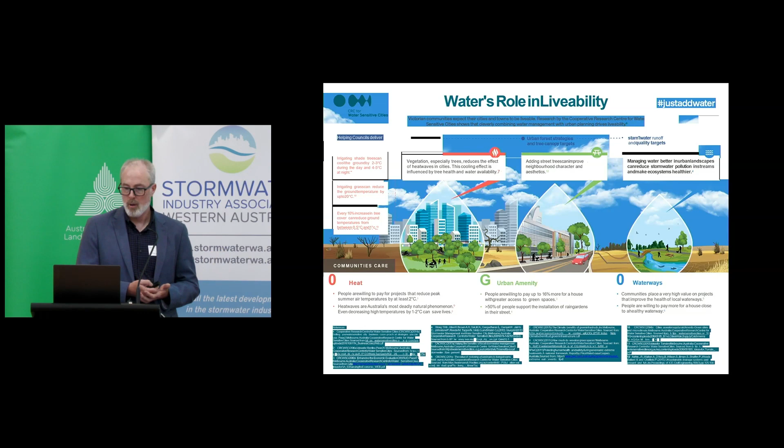When we look at this vision and these ideas about livability, I love this slide and I love where it came from, and I could just talk about this, but I need to stay on track — because this came from Waterwise Perth, Kep Kadajin, Gubby Gudajin, the Waterwise plan for Perth.

This shows the vision of what we could create. I won't get into all the details, but really it's about connecting people to nature and connecting people to water for livability outcomes, because at the moment, and the way our city's developed, we haven't been doing that.

We've typically had these types of systems — single use, fenced off, behind barbed wire, inaccessible, and just for that one purpose of drainage. I do have to acknowledge, while this is a Water Corp site, it's just been a privilege and a pleasure to work with all the people from Water Corp, particularly the Livable Community section, and many others, to look at how we can transform these areas and change them from this single use to these multiple benefits.

Today I'll talk a little bit about Bannister Creek, and I'll talk about another project before we get onto Lake Street. But I'm really also talking on behalf of others, because this project started well before my time — Julie Roberts, one of the absolute legends in this space, now runs Fat Frog Consulting, Friends of Bannister Creek, Circle, Water Corp, all these amazing community members.

Sorry? DBCA. I was getting there, Debbie.

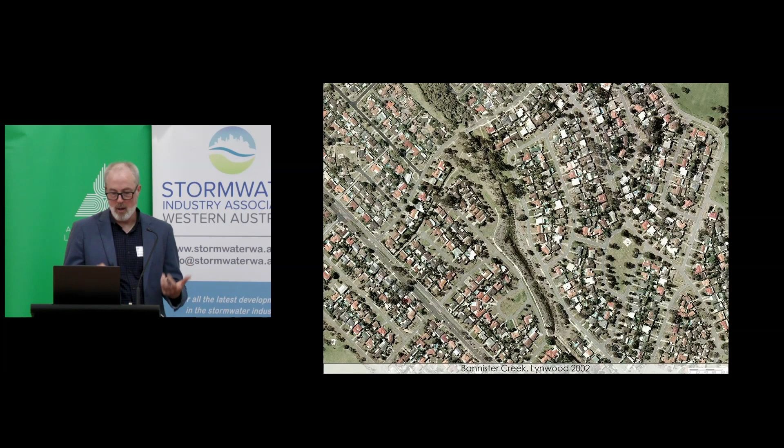This was Bannister Creek back in Lynwood, once part of that channelized natural drain. Over the years, Lynwood quickly moved with that vision to transform it back into a natural system, with ecologists working with engineers, working with landscape architects, with local community members to transform it. And this is what it looks like now. For so many people that travel and live in this area who haven't seen the development over the years, they just think it's a natural system. But it's an amazing example of how humans, through design and community initiative, can really heal our landscape and take a different approach, because this is still part of that system.

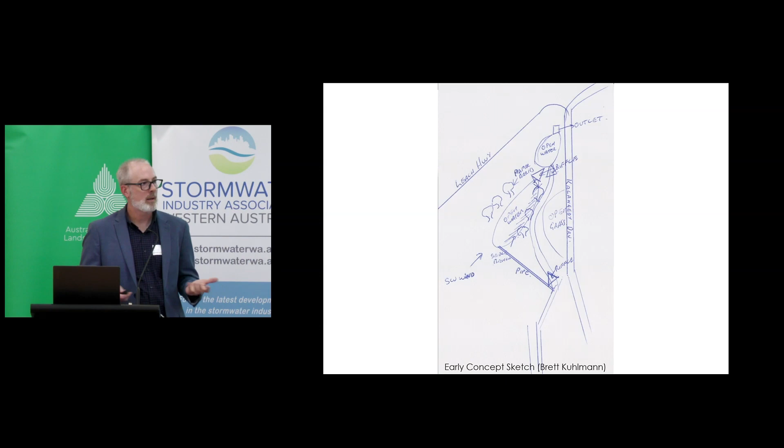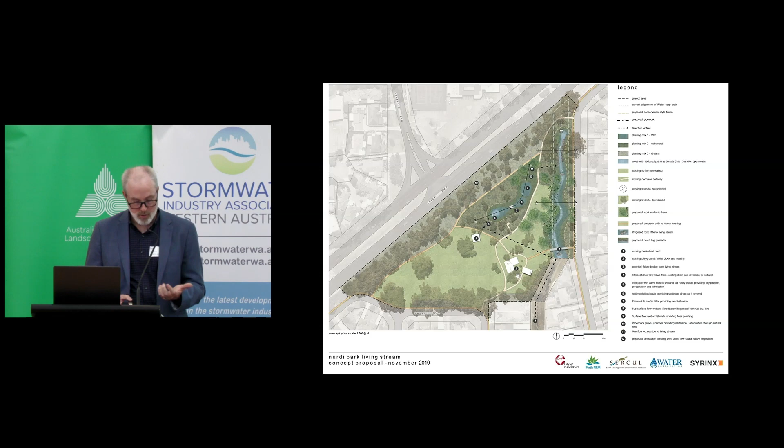Nurdi Park was just pretty much a big turf park. It didn't have a lot of interest, and there was a lot of space there. So this plan was developed with all those partners to actually create a living stream, but also a diversion and create a wetland within the park. And this has been embraced by the residents there. It hasn't led to a loss of the park. It's led to a greater richness being brought into the park. It's led to greater biodiversity within the park, and just creating a beautiful area.

Part of that beauty is from the plants and the biodiversity that we bring back. And that's certainly a message. With these projects, we have such an amazing plant diversity in Western Australia. We should be planting as many species as we can for resilience, for diversity. But literally through these projects, we have the power to bring back biodiversity, to help heal the land and create those food sources for the insects, for the birds, and for the whole ecosystem.

I'll just flick through quite quickly a couple of the photos of the project. Fenced off trapezoidal drain - let's not go back into the details of 2020.

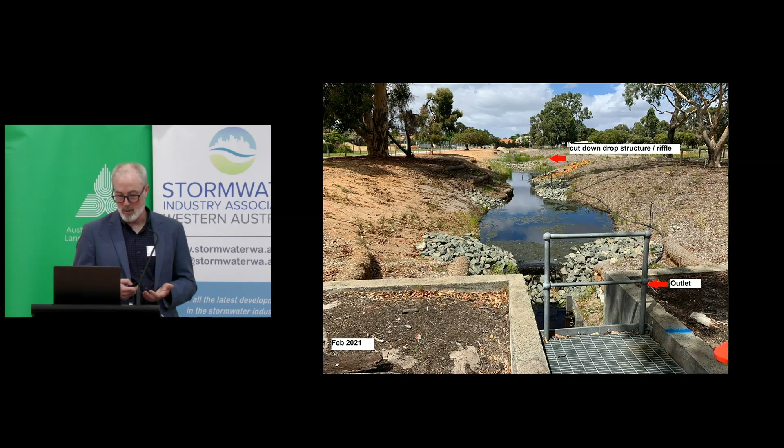Then quickly, as the project progressed in 2021, that reshaping happened, and by 2022, it became this beautiful natural system.

It's still adjusting, but we're getting really high counts of macroinvertebrates that are indicating a really high level of biodiversity within the system. It's that thing of build it and they will come.

Similarly with the wetland, rapid plant growth - we've got high nutrients, and that goes really well with plants in terms of those plants pulling those nutrients out of the system.

And again, some more areas that just so quickly transformed into these natural systems. For many visitors, for the first time, they just go, wow, this project's amazing.

It's been here for years, and going, no, it's actually only a few years old. But it's that power that we can have to transform our landscape for the better.

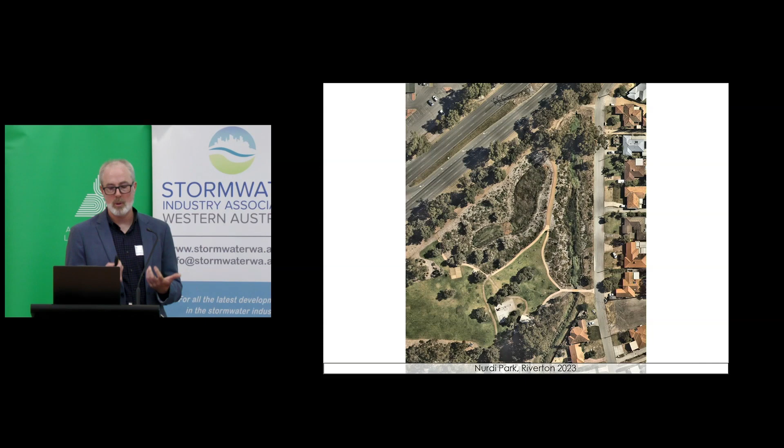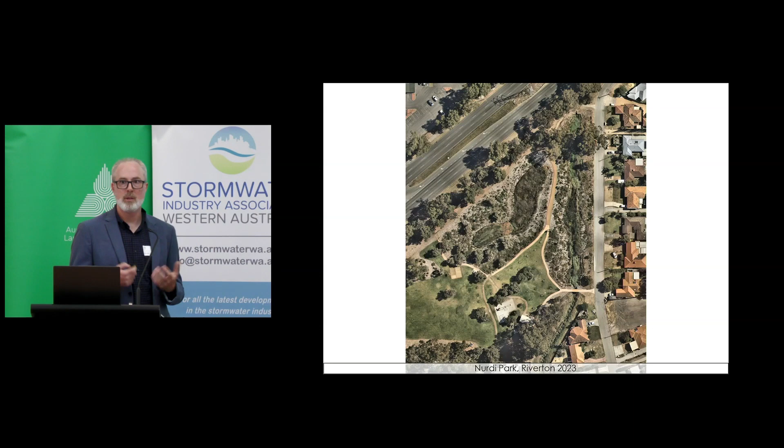Just a quick finishing up on the aerial of Nurdi, looking at that site with not a lot of interest to now - the path network, the local residents that are starting to actually form their own friends group and look after this site, the beauty that it brings into the space, and the biodiversity, the cooling and the livability just speaks to why we should be doing so many more of these projects and the opportunities that exist within our urban areas to do so.

Now I'll just touch on another large project and the intro into Lake Street. This is the Canning City Centre Master Plan.

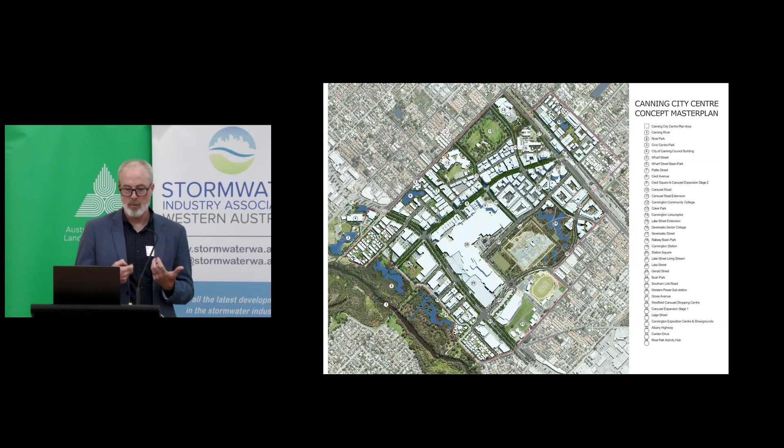At the City of Canning, we're one of the strategic metropolitan growth areas to have high density living around transport nodes. The City of Canning developed this vision to have a riverine city with the Djarlgarra at the base of the city centre, but linking these amazing water assets that are all through the city to the growth of its urban area and creating these connections, bringing nature back into the city.

How that might actually look more from a drainage management perspective - it's all these different drainage lines and spots all around the city that represent the drainage network that exists. But these also represent opportunities.

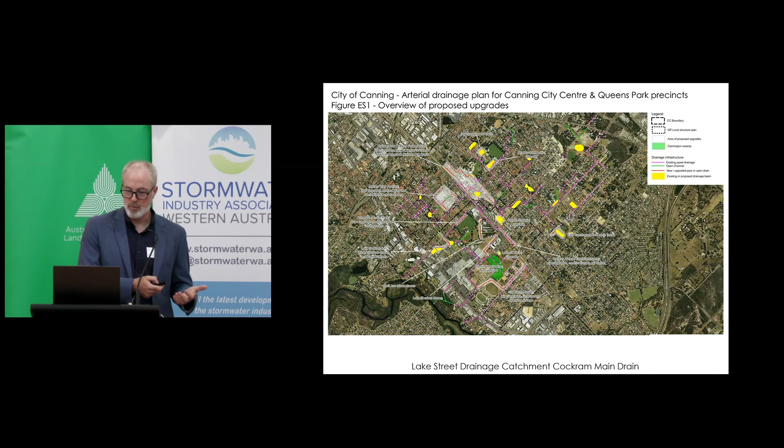We've had some amazing projects happen over the years at Wharf Street Wetlands and the Wharf Street Basin, and then recently with the Lake Street Urban Stream, which, funnily enough, started off like this.

But it was through that vision, through that plan, and through the ideas, but also through the collaboration that we're able to transform this area.

It started off with a number of concept designs, and I guess when I took this project on, it was also to start interrogating the designs and go, how am I going to build this? Or how are we - sorry, not I, it's a much bigger team - how are we going to build this? And how are we going to build it for the budget we've got?

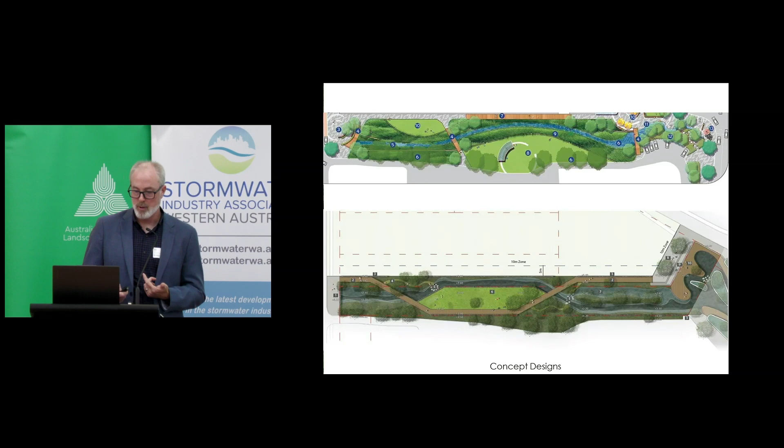So we actually went through a design review process and started questioning some of the elements in the concept design, and actually made the decision to move to a design and construct process.

And that is a good point to hand over to Shadra, and she's going to talk about the rest of the project and what we're able to achieve.

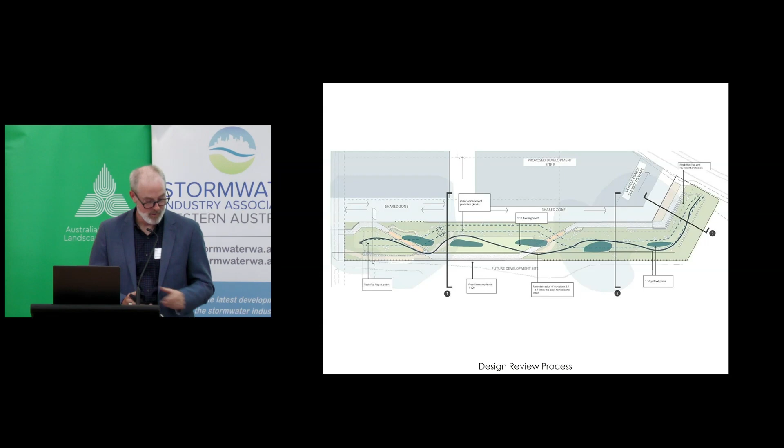So my name's Shadra. I was the landscape architect from LD Total working on this project as a design and construct project. I'm going to fly through these because I'm very mindful of time.

This was the kind of concept we had for this, and what was quite key about it was we needed to keep the drain in its current situation. We couldn't really be looking at relocating it or changing the channel or anything like that, which I'll talk a bit more further down the track, but basically due to the acid sulfate situation.

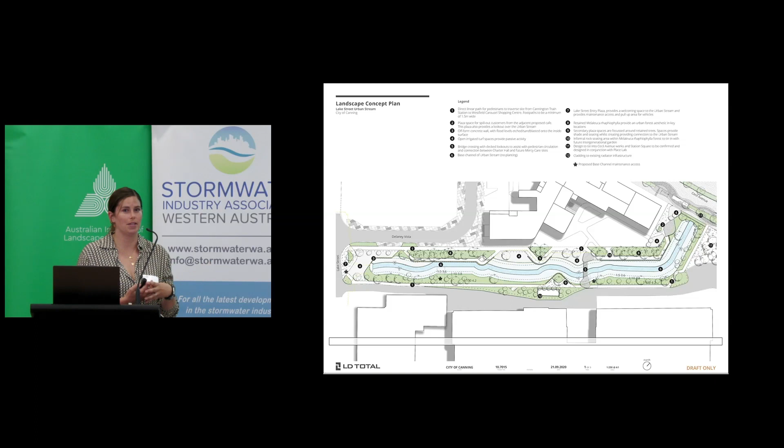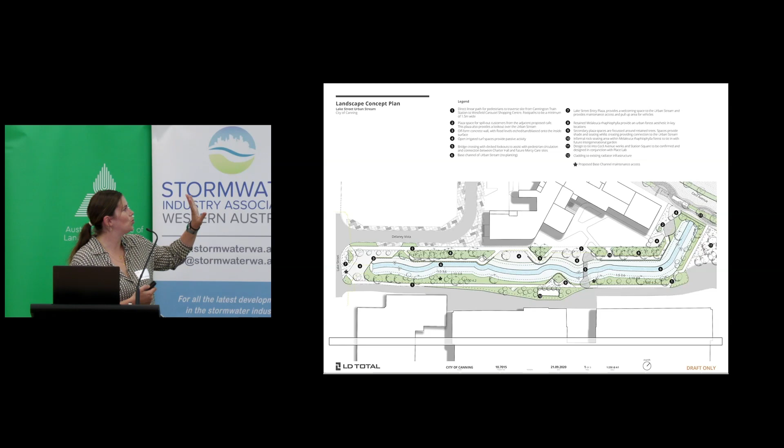As you can see, it was very much about creating linkages where we could and key footpaths, so that people could travel from the train station all the way through to the shopping centre.

What I'm going to talk about is the process of construction. As much as we came up against significant challenges, we were able to overcome these, and I think it's a really good example of the fact that just because something looks too hard to do doesn't mean we shouldn't be doing it. It takes a very collaborative group of people to achieve that, and that is certainly what we had on this project.

I couldn't even name everyone who worked on this project because there were so many people, and so many incredible people as well. But this gives you an idea of where we started.

Hugely weed infested, which would have affected the hydrology of the drain in the first place. Little to no endemic species whatsoever, so the biodiversity would have been compromised to a certain extent. And it was a source of antisocial behaviour - there was no way you were going to be walking anywhere near this location with no lighting, in the middle of the night, male or female.

So one of the first things we did, even before we got all the approvals in place, was to look at weed management. We wanted to make sure we treated all the weeds at their source and had a few years of weed management in there to make sure the end product was going to be as true to endemic species as possible. That utilised a series of sprays, which were okay for water drainage infrastructure, and also cutting down - we had poplars, willow trees, anything and everything. So that was our first stage.

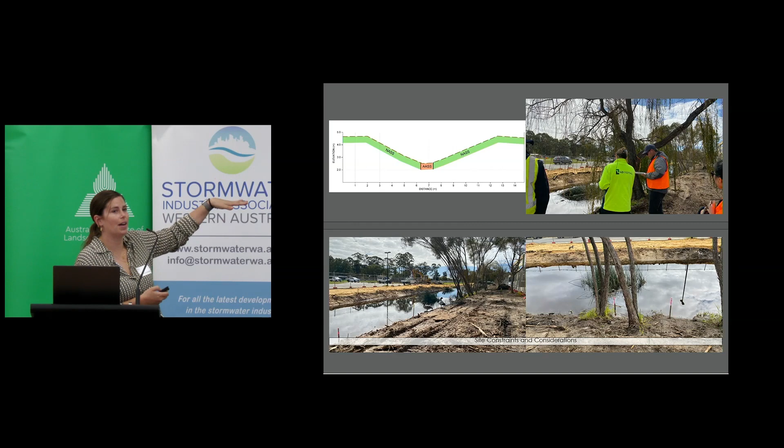As you can see, clay was another issue we came up against - it was H category, which was a great one to play with. The little section up the top shows what we were dealing with, the acid sulfate. Basically anything below the existing waterline, and this site is wet year round, we weren't going to be touching, to avoid releasing that into the wider system.

Doing this project as a design and construct meant we could work through it quite systematically, which meant a lot, especially for this little family of ducks, which you'll see a few more times. They stayed on site during the whole construction, and actually had two seasons of ducklings on site during construction, which was quite fun.

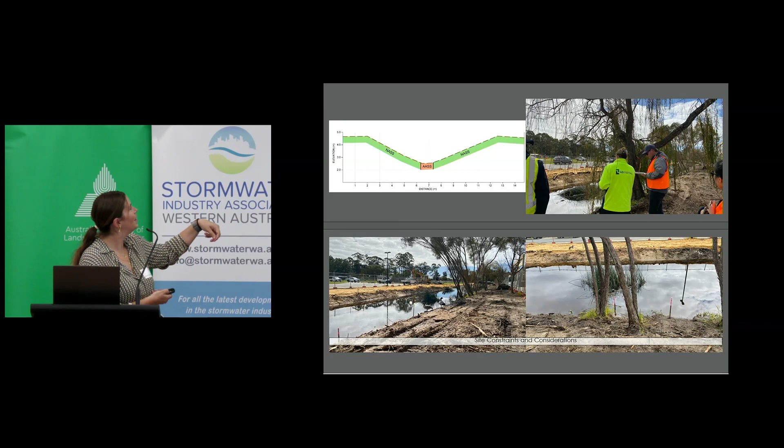This shows the hydrology that we were dealing with. The red line is our 1 in 100 flood zone. So yes, everything floods - it's Perth, that's what happens everywhere.

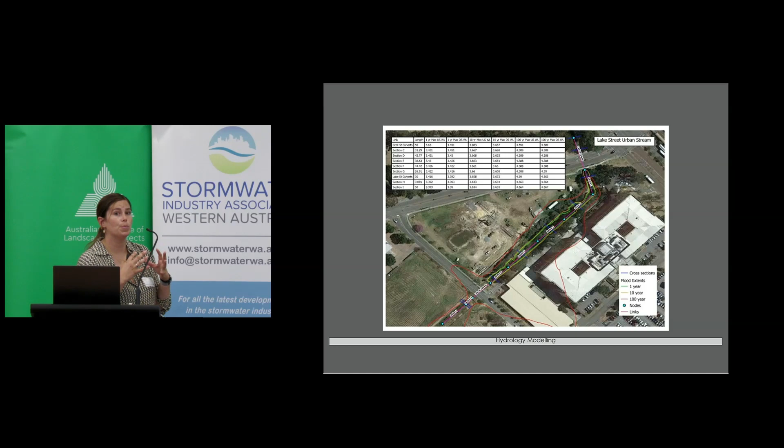What we were able to do with the modelling, and with redoing the sides of the drainage channel, was actually bring that flood line in. We steepened it up in areas and shallowed it out in other areas, and were very strategic about this during the design. Working with our civil engineers and hydrologists, it was a constant back and forth with everybody to bring that in and tighten it as much as possible, while still providing amenity for the future community that will be through here.

This is kind of the process, gives you an idea of what we were dealing with. The drain itself is quite wide - the overall site at its widest is only 25 metres, and at its narrowest only 20 metres. So it's an extremely constrained site, but we were still able to achieve it. It just meant a lot of interrogation and a lot of working together collaboratively.

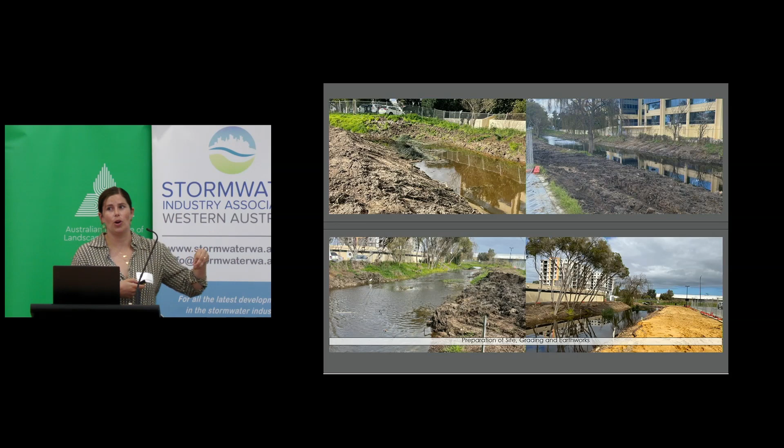This gives you an idea of the walls, which we had to deal with in terms of the clay that was here. We removed a lot of clay, but we also had to contend with it as well. These retaining walls have concrete footings, they have ag drains behind them, they have reo all through them. They are not moving in an earthquake.

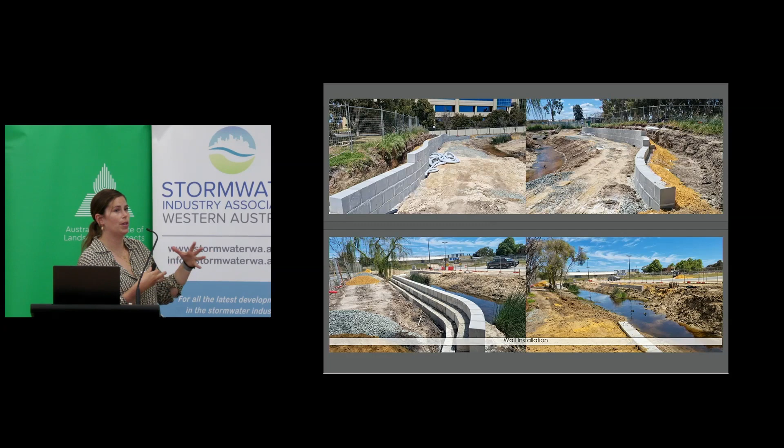But it just shows that you can do it. Through the design and construct process, once we worked out exactly what levels we needed, because they were different from the surveys we had, we could push and pull these walls to where we needed them, and also to save money, because budget is obviously a constraint, to get the best outcome in the end.

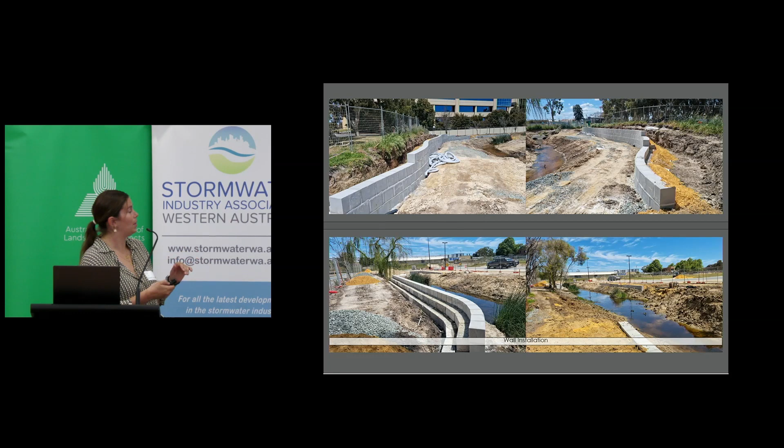This is our lovely family of ducks in the top corner. They literally had about 12 ducklings that were there through the whole construction. But this gives you an idea of the process.

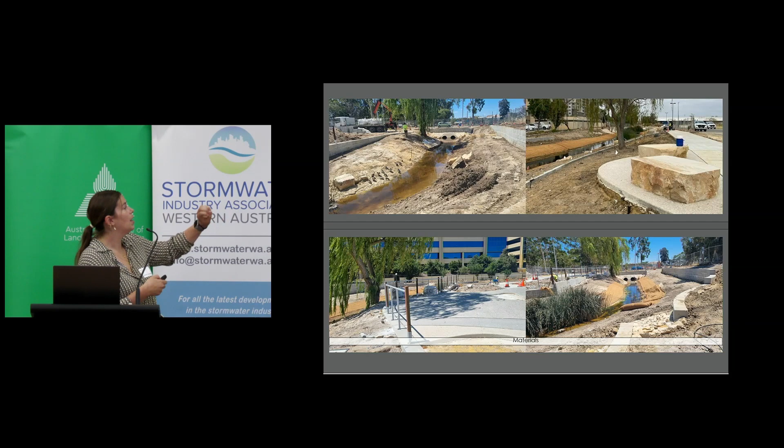So we've got the jute matting in the 1 in 1 flood zone for obvious reasons, and then we've got some exposed ag at one of the plaza ends as well.

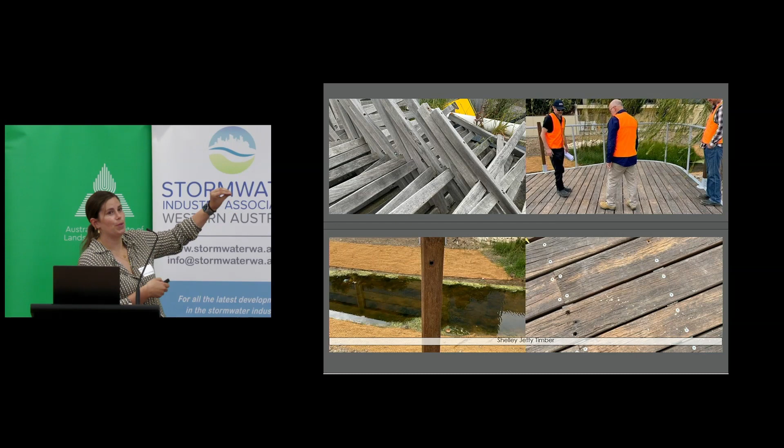Very quick story about this timber. It's the most beautiful timber. It's from the Shelley Jetty that City of Canning had actually dismantled, and they'd kept this timber at their yard. I designed the deck to basically use up all the leftover timber that was usable, and that's now something that speaks to the heritage of the City of Canning, which is just a beautiful aspect to be able to include in an urban space.

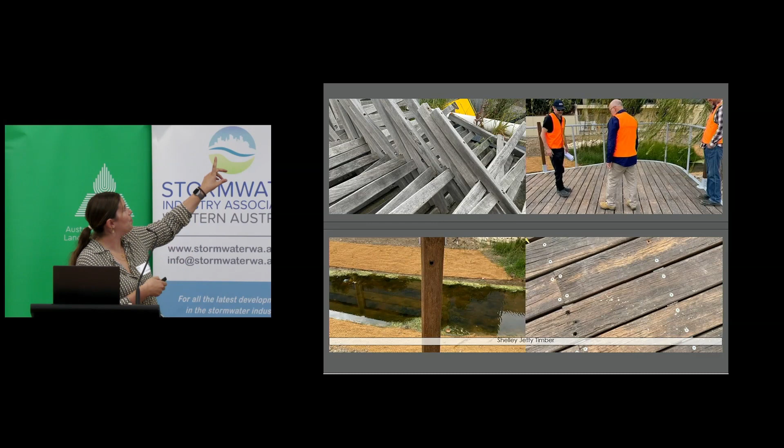And we also used the uprights for the balustrade. So all the key uprights are also from the Shelley Jetty, which was just really lovely. That's probably my favourite piece in the whole project.

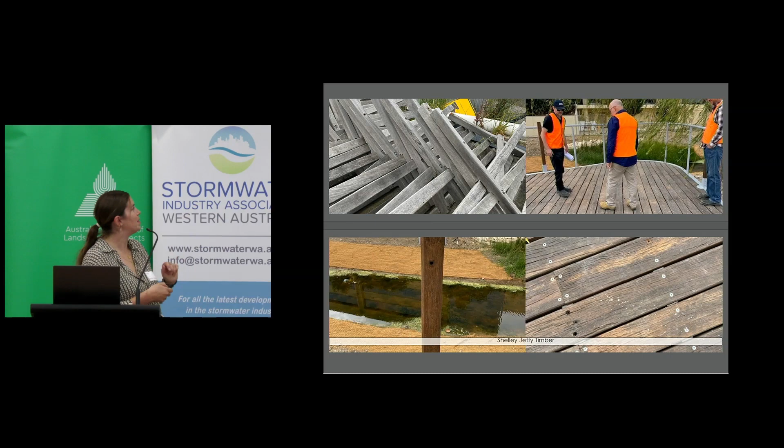Planting, this was huge. We planted close to 60 new endemic tree species, Banksias, Melaleucas, and Eucalyptus rudis, and we planted over 6,000 plants, comprising about 50 different endemic species. That biodiversity that we were able to put back into this project is just incredible. I even jumped on Nearmap this morning to have a look at how it's looking, and it's mind-blowing.

We were also able to retain a lot of the melaleucas that were on site, which meant we had instant canopy. It also helps to stabilise the bank. There were also reeds that we were able to keep, which meant there were little islands of refuge for the fauna during construction, and that was just incredible. As soon as we stepped back, you've got dragonflies, invertebrates, fish, tadpoles — it just blew up. It was incredible.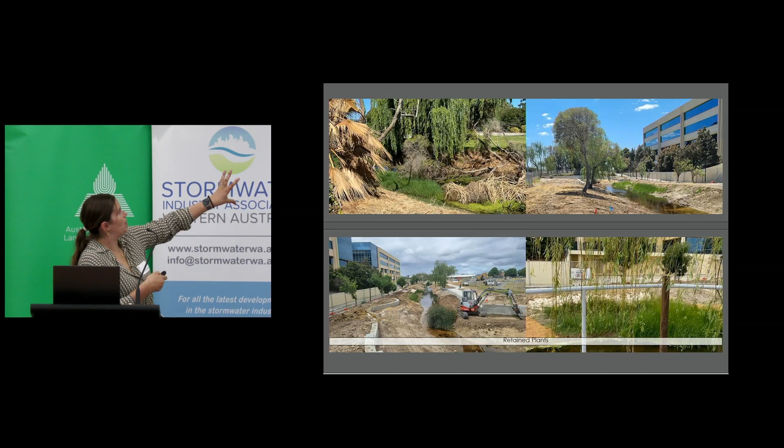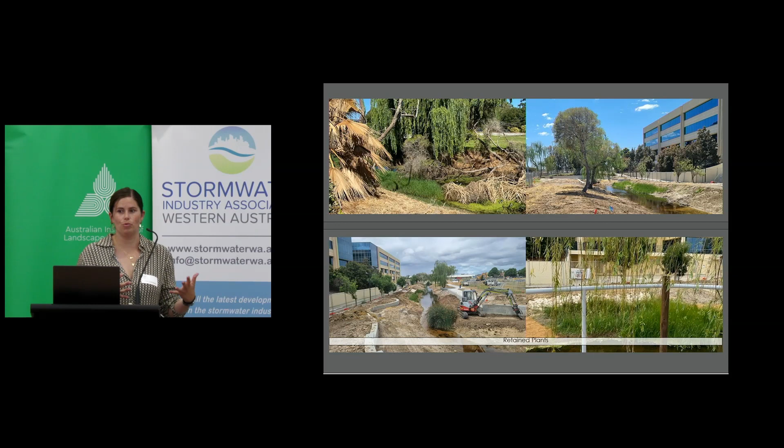Again, this was just me talking about some of the retained plants. We did keep some willow trees, which kind of seems a bit counterintuitive. The reality is there is a nostalgic feeling to willows in these sorts of spaces, and there will be a long-term plan to eventually remove those as they deteriorate and as the endemic tree species grow and acclimatise to this area. And this is the finished product.